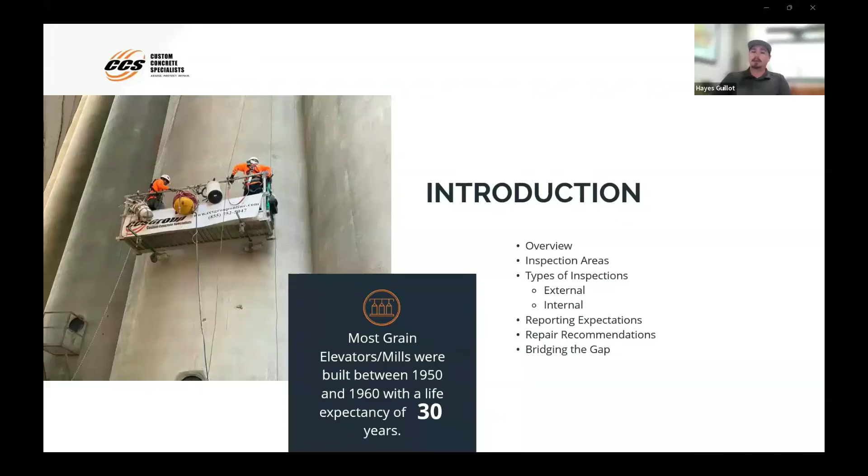So most grain elevators and mills were built between the 1950s and 1960s with a life expectancy of 30 years. Now, most of these facilities have long been operating past that, and part of that is because of maintenance and keeping everything running as it should. So we're going to talk about some of those maintenance areas, some concerns of what you'll find around these facilities, different types of inspections, the deliverables and reports we get from those inspections, the repair recommendations, and then finally taking all of what I'll present on and what we call bridging the gap, and explaining what that is later in the slides.

So the importance of maintaining a facility is preventative versus emergency. Some things to consider would be cost. Structural repairs may cost 10 times more than preventative maintenance per silo. And then also to go along with that, the downtime. Preventative maintenance has little to no downtime as opposed to full scope structural repairs, which could span multiple weeks, if not months, depending on the scope.

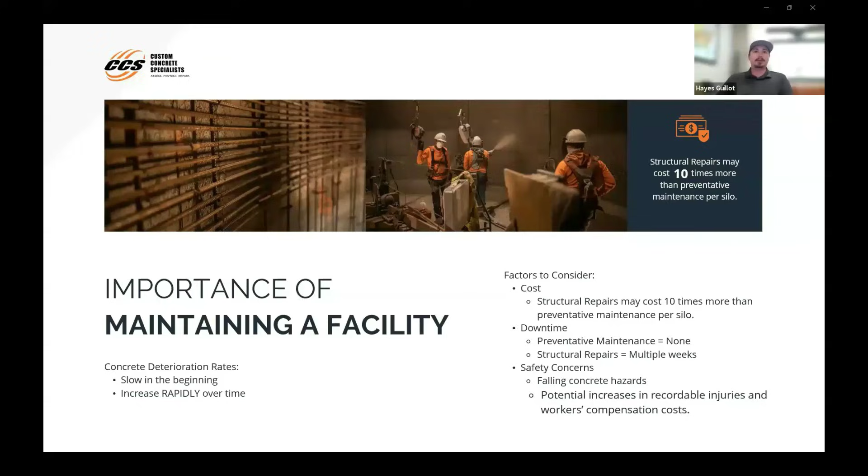Then safety concerns. Anytime you have concrete delaminating from a silo, there is that concern of it falling, hitting vehicles, hitting people. And to go along with that, you have the increase in recordable injuries and workers' compensation costs. So nobody wants that. And then a little note here, concrete deterioration rates. It starts very slow. You get some little cracking, some spalling. But once that shell starts to crack and you introduce moisture, freeze thaw, the weathering conditions, it increases rapidly over time. So don't wait for an emergency.

Deterioration occurs. It's a normal part of concrete, a normal part of your facility. Normal wear and tear, it happens. Exposure to weather, especially, like I said, that freeze and thaw, where you get moisture and then in the winter it freezes, and then when you get a warmer day it thaws, and that repetitive cycle causes the damage in those small areas to expand quite quickly.

Then you have structural deficiencies and failures. Sometimes you'll see that when these silos were initially constructed, engineering back in the 40s and 50s wasn't as streamlined, wasn't as up to date as what we have now with the technology we use now. So they had to just go with what they had. So rebar and the way they built these wasn't always an exact science.

Then you have operational changes. When these silos were built in the 50s or 60s, the turn rate of these bins wasn't as much as what a lot of these facilities are doing now. With the increased size of legs and conveyors, we're able to fill and empty these bins a lot quicker. And because of that, a lot of people add these larger pieces of equipment on the outside without reinforcing the silos themselves.

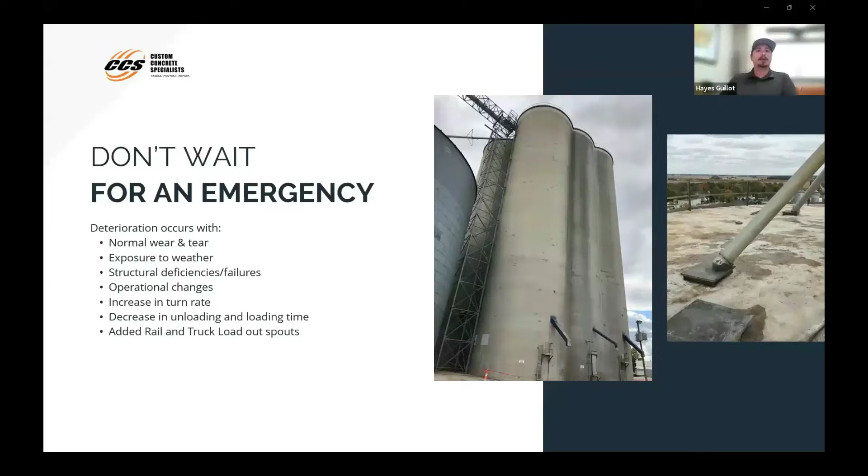That can also rapidly increase the deterioration rate of a silo. And along with that, if you're adding any truck or rail loadout spouts, cutting holes in the silo, that will also affect the structural integrity of those silos.

So we like to approach it as a yearly checkup as opposed to an emergency room visit. Focus more on the yearly checkup, make sure everything's still looking good, rather than the 'oh my gosh, we have a major problem and we need to get this fixed right now.'

So establish a baseline health check for your facility. We'll come out, take a look at the entire facility, and make notes of any areas of concern, any areas that we want to monitor.

And it doesn't have to be something wrong with your facility. I have a lot of facilities that just want that baseline health check and that kind of stamp of approval that everything looks good. That would decrease insurance costs. A lot of insurance companies, if you can show that you've had an inspection, will decrease what you're paying for your facility's insurance. So being preventative or proactive as opposed to having to be reactive when there's something major happening.

And then information gathered can be shared with engineering. So we share all of our deliverables with the customer, which can then be passed along to engineering companies, or just used internally within the company or wherever else it's needed.

So I've talked a little bit about moisture, freeze thaw, and moisture migration. Moisture migration exerts force on concrete, and it causes tiny cracks in that concrete.

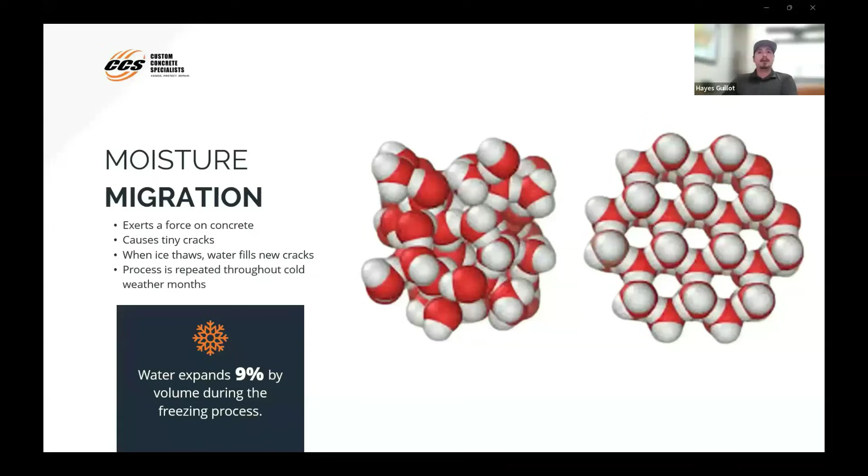So when water gets in and freezes, it fills those new cracks. And as that process repeats and expands those cracks, water expands 9% by volume during the freezing process. So even the littlest crack, if water can get in there and freeze, it starts pushing that out, expanding cracks, corroding rebar. When you introduce moisture to rebar, the corrosion makes that bar expand as well, which then causes more cracks and the delamination of concrete.

So some external inspection areas I wanted to touch on today are the silo walls themselves, the apex walls which are the crooks of the round silos, the roofs, the beam pockets, cornice areas, any bulging areas, wall penetrating equipment, and just all around noticeable changes or things around your facility.

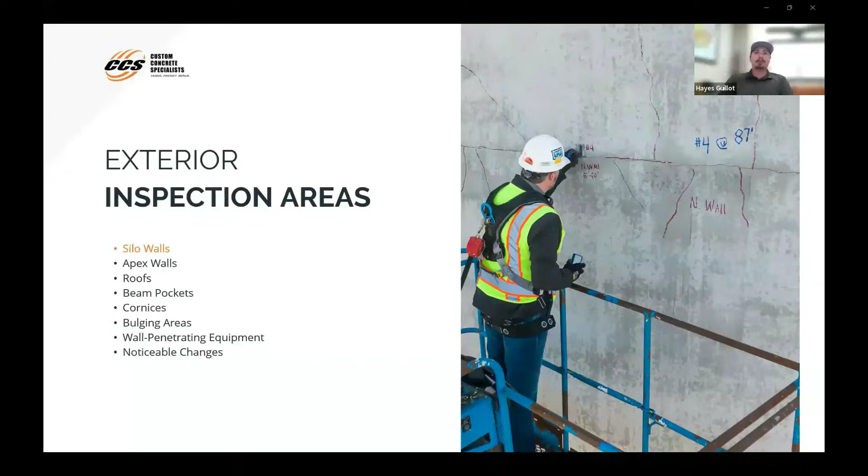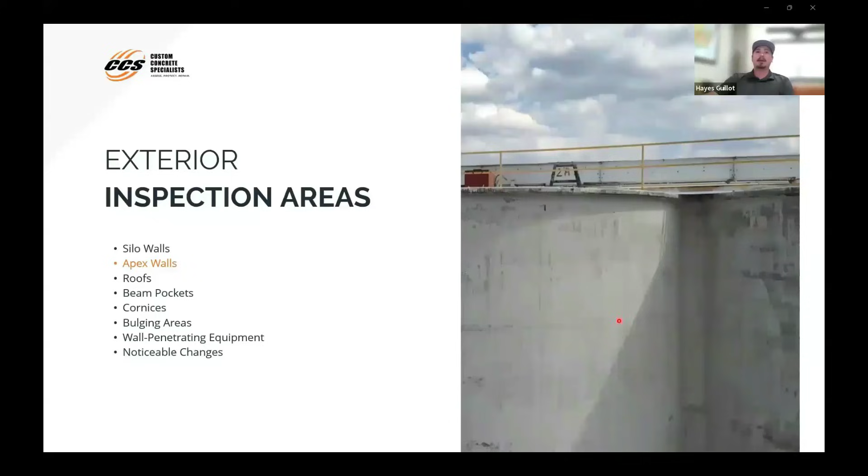So your apex walls are these areas here where the round silos tie into the walls. A lot of times you'll see some separation here, so we just want to make sure that we're not seeing that, or if we are, we can monitor that as well.

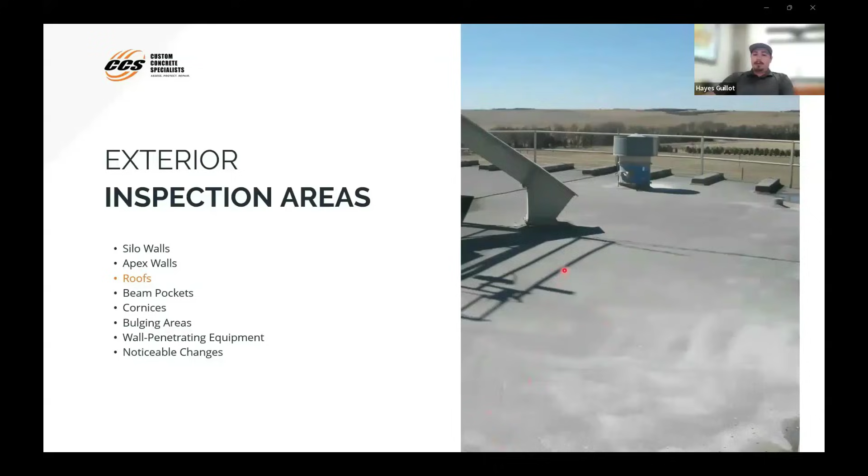Beam pocket areas—so where your roof sits on top of the silo with those beams. They're two separate pieces, so your silo itself and your roof freely move independently.

So as those silos go into tension when filled, or contract as you empty, those walls and those beams can knock up against each other. And over time, that knocking against each other can start causing concrete to crack out, to delaminate and fall, and eventually those beam seats won't have any concrete holding them on.

And in worst case scenarios, those beams will separate from the roof and potentially fall into your silo, causing quite a bit of damage and being very difficult to get out. So you definitely want to catch that before something like that were to happen.

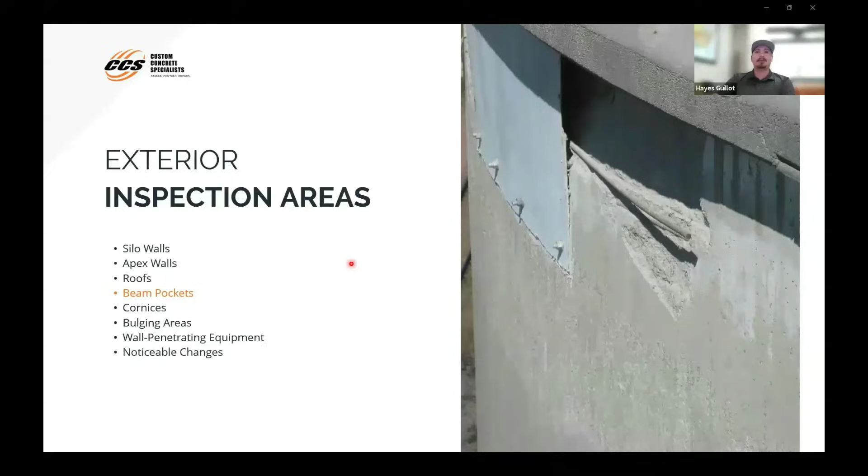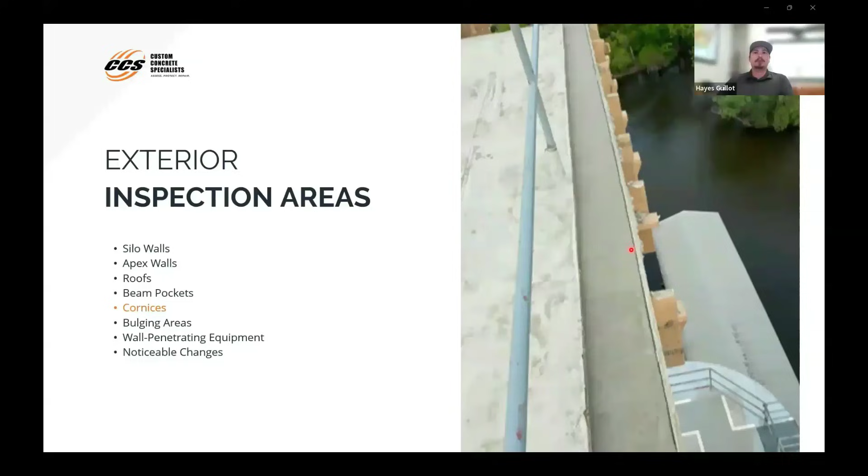Then your cornices crack and fall off over time, especially as you have moisture running over them. Any cracks that moisture can find start causing that to delaminate.

Then any bulging areas—this area here would be a pretty big concern. We would definitely want to do something about that. There's a lot of pressure pushing up against these walls. I would assume just visually that this is lacking rebar, and we could actually find that out for sure by using a GPR, or ground penetrating radar, scan over this area, which I'll get into more detail on in a minute. But this is definitely an area where a potential rupture could happen.

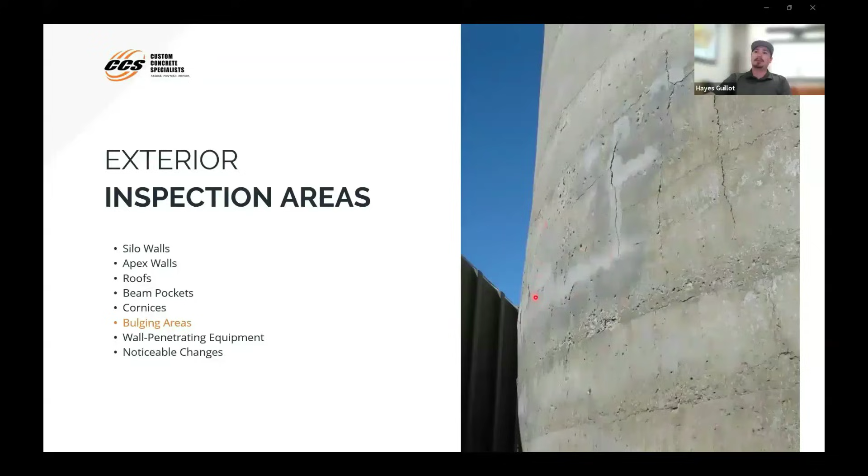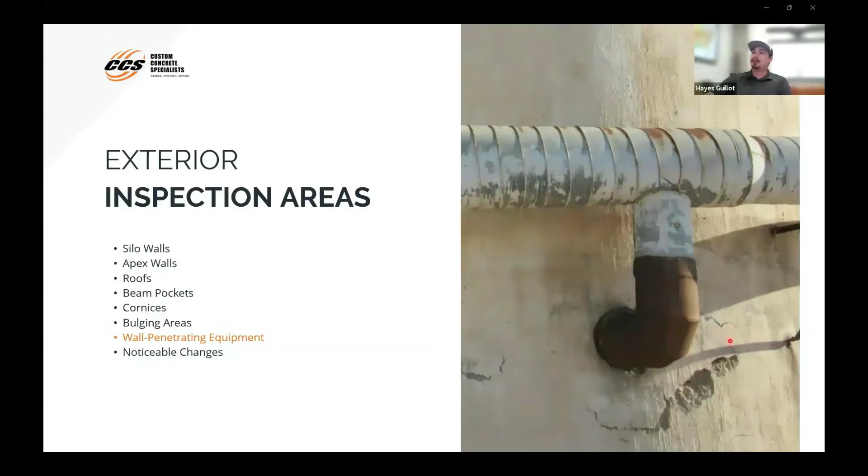Then we definitely want to look at any wall penetrating equipment, so any of your aeration, any spouts, any fans. Sometimes when they put these in, they're an afterthought. So they'll just cut a hole and run air, like this here is aeration, run the aeration in without necessarily reinforcing that area.

So if that's the case, you'll start seeing some cracking and spalling around there. And then just any areas of noticeable changes that we want to monitor over time to make sure they don't get worse. This area here is a good example. Above and below, you're not seeing a lot of cracking, but this elevation here, you have quite a bit of vertical and horizontal and even some diagonal cracking.

So we would want to take note of that and measure some of these areas, and then maybe a year down the road when we come back, just make sure that this hasn't grown. If it hasn't, then we know it's cracked to the extent of what it's going to do. If it has, then we can talk about why it's doing that.

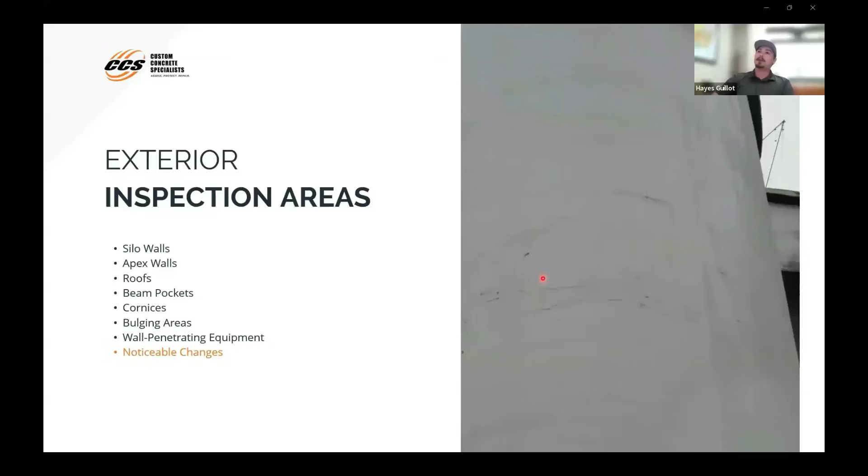So this here could potentially be lacking rebar. It could be that the rebar is there, but it was floated too far to the outside of the wall in this elevation. So that's why it's starting to crack out as that silo goes into tension. It's putting some force on those outside walls and just causing some cracking. So there's a lot of ways we can determine what the cause of it is, but just here we're looking at it visually at this point and just want to monitor it.

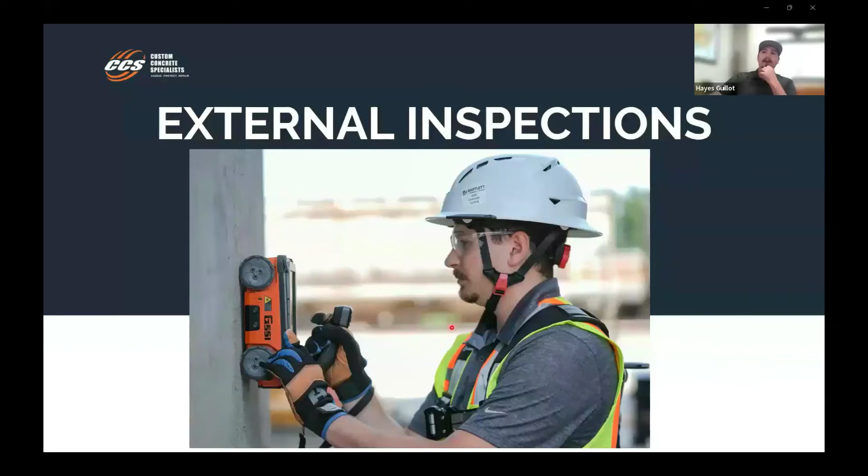So then some of the technology we use for external inspections are this here is a ground penetrating radar, and I'll go into that a little bit here in a minute.

And then sound testing. So what sound testing is, we go up in a boom lift or up on some platforms, depending what elevation we need to sound test. And we'll hit the wall with a hammer to kind of determine the amount of potential spalling in a certain area.

Solid concrete will produce a ringing sound when hit with a hammer, whereas an area that has a risk of spalling will produce kind of a flat or hollow sound. So we'll go around all the way up the silo and hit some areas to determine which areas are at risk of spalling.

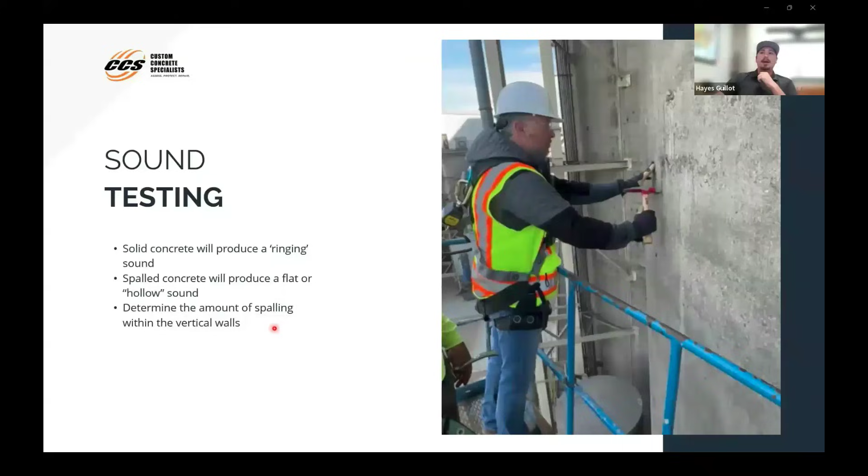So we can get a really close look with the drone, and we capture videos for the entirety of the facility. We also capture up close pictures or points of interest, POIs. We can get elevations off of the drone, so it's constantly capturing at what elevation we are at. So I can say at 65 feet, there is a vertical crack on the west wall.

And then all this data is very easy to share. We share in multiple different ways, so usually Dropbox, SharePoint, or we can actually send it to you on a thumb drive or a hard drive. And then this makes it very easy to re-inspect the same silo, same facility year over year.

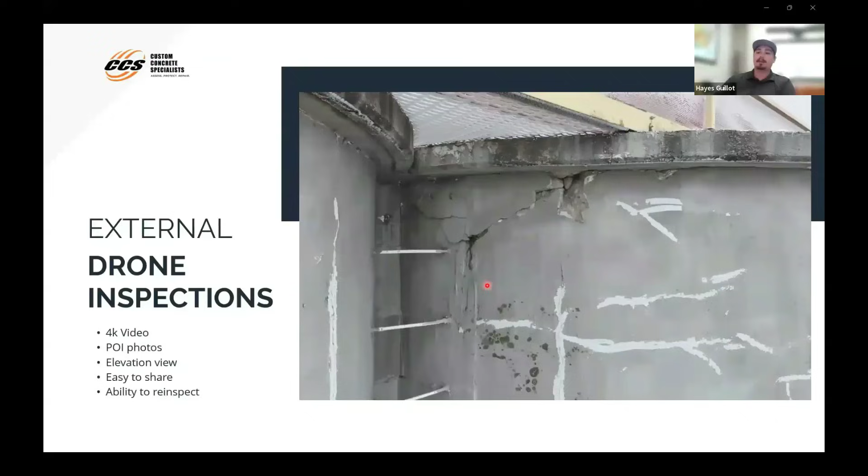So GPR, or ground penetrating radar, is this device here, and it helps locate horizontal and vertical rebar. So we are able to identify every single piece of rebar in that silo. We're also able to determine the depth of the rebar into the concrete and the entire wall thickness as well.

One thing that I get asked a lot prior to doing the GPR inspection is, do the silos need to be empty, or can they be full? Can we be filling them, emptying them? The answer is yes. It can be full, it could be empty.

This is an external inspection, and the way we do this is we utilize an aerial lift, and we start at the very base of the silo, and we run the scanner vertically all the way up to the top of the silo just underneath the cornice. And we are mapping every single piece of rebar along the way.

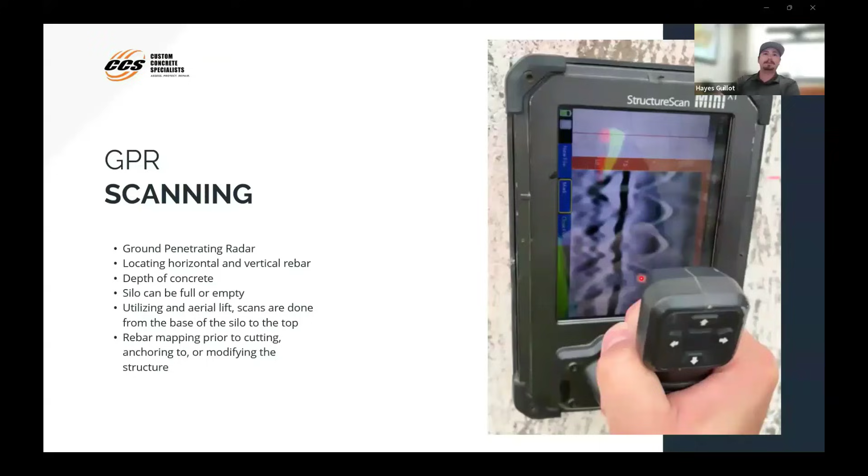And this is what it looks like on the scanner, as well as when I bring it into the software to process. These mountain ridge looking areas are the rebar itself. They're called hyperbolas, or we call them heartbeats, as we go up. This will show the depth into the concrete as well as the spacing between each bar.

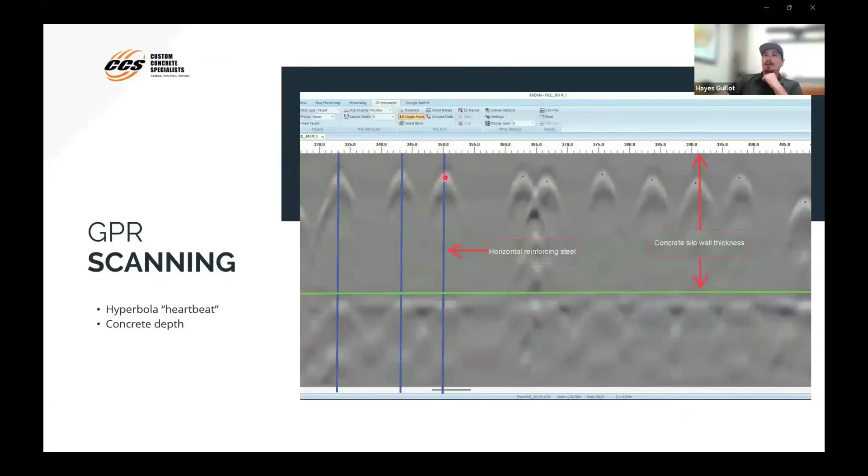And I go in and literally click on each one of these hyperbolas, and then it generates a report with all of the findings. So I'll show some reports here in a minute.

The internal inspection areas, this is where we use that internal drone. So we put this internal drone in from either a top opening or a side opening, and we are able to inspect the entirety of the inside of the silo. So everything from the roof to the walls to the hopper, and just get a full look at everything going on inside that silo.

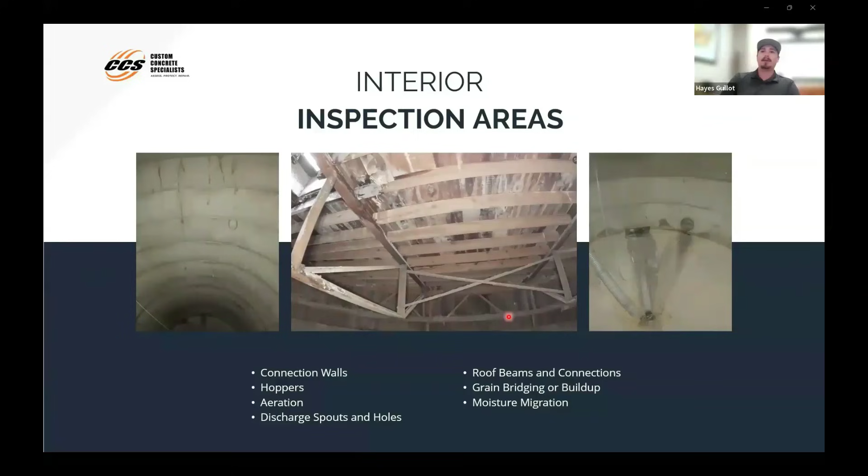So I wanted to show real quick the software. So I'm going to switch screens real quick.

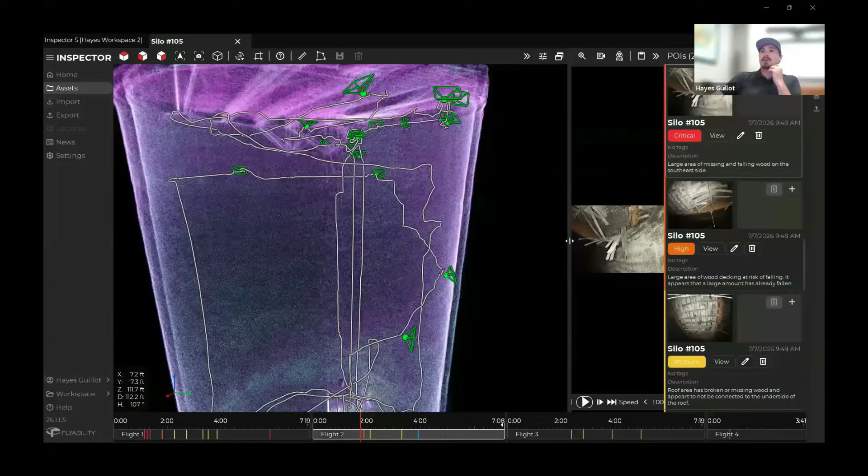All right, so what I have here is the actual inspector software that we bring all the internal drone data into to process and look at everything. So we have a few different features here. One of the most interesting ones is this LiDAR point cloud here.

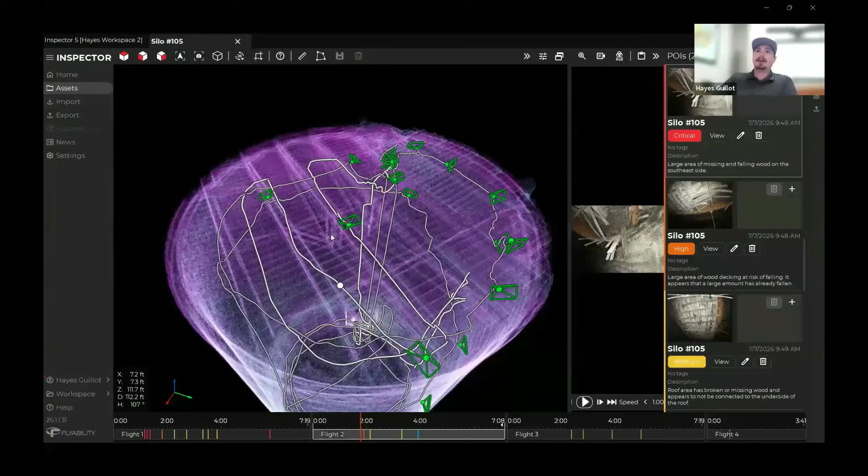The drone itself, the drone we use is a Flyability Elios 3. And so it has a LiDAR puck on it, and we're able to create a 3D model of the entirety of the silo. So I'm going to kind of navigate around.

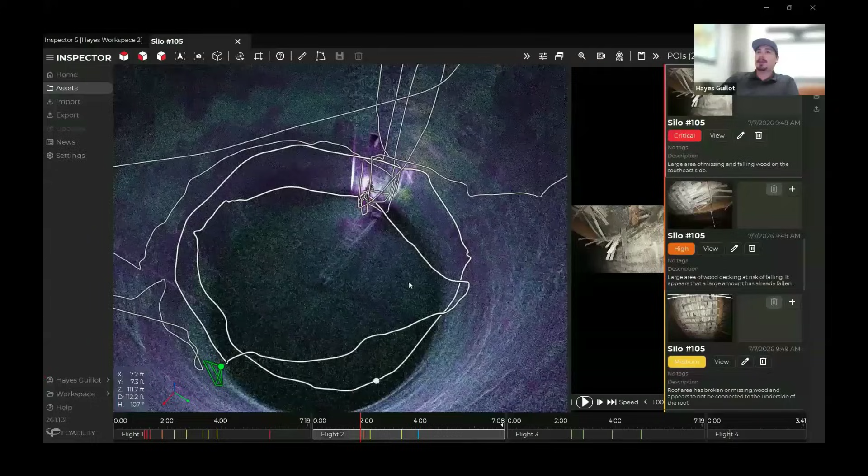You can see the hopper here. This lower entrance is where I entered the drone. It actually shows all of my flight path as I flew around the silo.

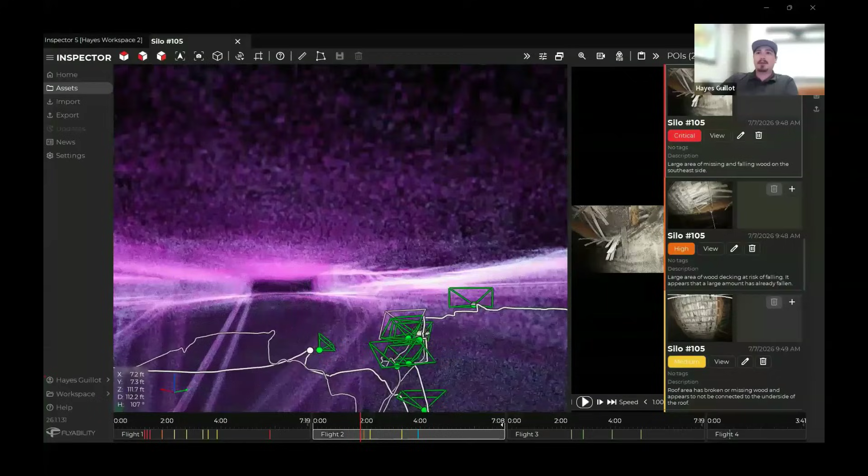And then if I zoom out here, zoom in a little bit, you can actually even see the roof beams and the wooden trusses. But what was going on with this silo particularly was they were having wood laminate off the roof.

So if I go here, you can actually see where that wood was sagging and had fallen. And then if I go to the actual drone's camera, you can see that area as well.

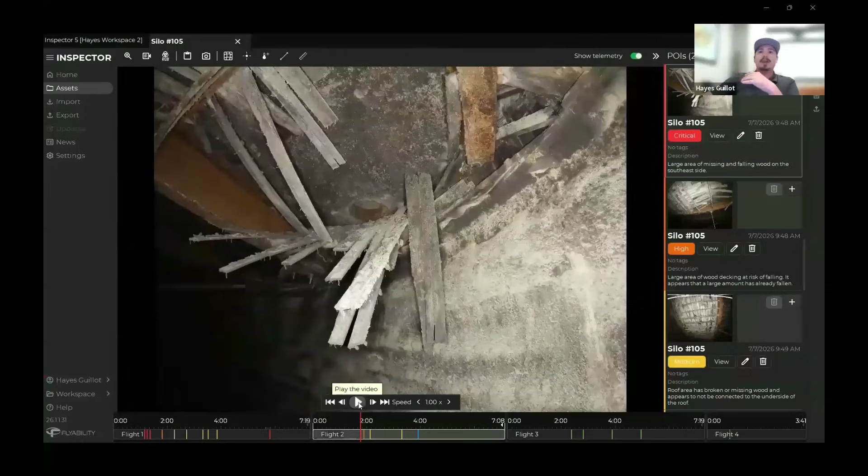So this is a video which I had paused at this area to show the LiDAR in that area. But if I play the video a little bit, you can see me flying around, looking at the roof here, looking at some of those areas that were falling down.

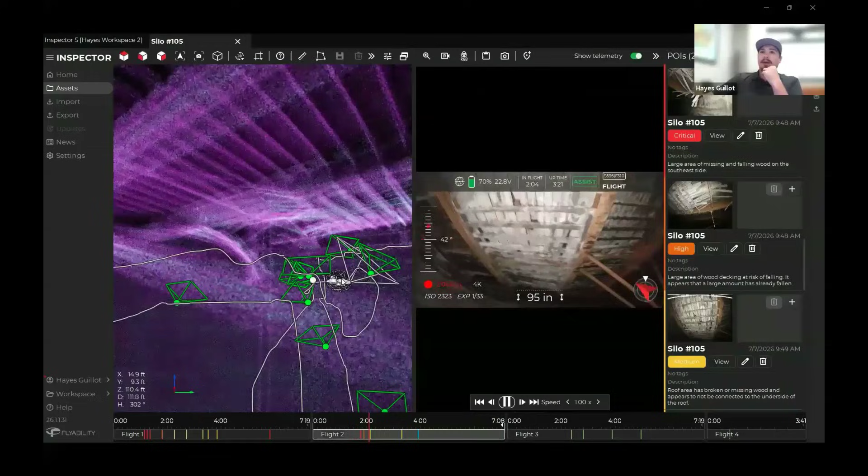And you can actually, while this is playing, see the little model drone flying around as well. So I can at any point pause this video and say, okay, well, there it is in the video, and kind of look around in the model as well to help get your bearings. It also helps with just identifying areas.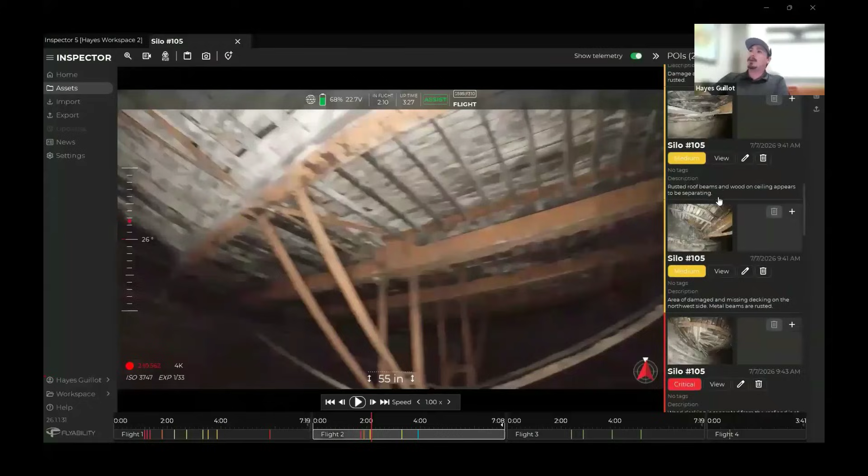Then this is how we generate reports that we give over to the customers as well. So for every area that we need to take pictures of, or some concerned areas like this area here, we can take a picture, label it with a criticality level. So definitely this is of concern, so we say very critical, and then I give a description.

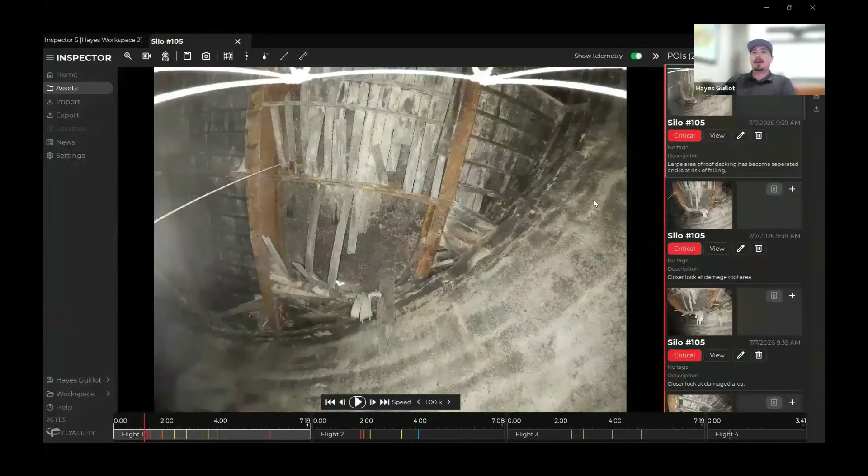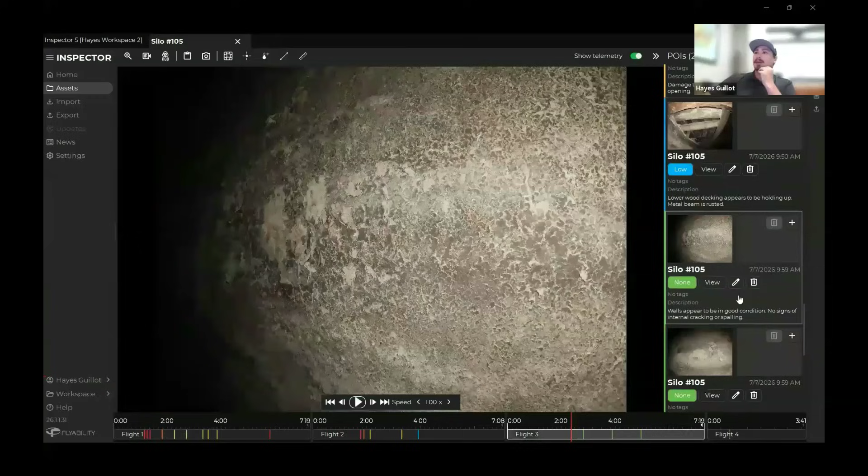This will show all the elevation, the X, Y, Z data, so you know exactly where in the silo this was taken. So if we took a picture of, like a wall, it's really hard to see in the picture, well, like where in the silo is that? So we know that if I click on it, go into edit, it shows the X, Y, and Z, and it will actually show in the video at what heading I was on looking at that. So 266, so we were kind of on the western side of the silo.

So that's the software. We can look at the entirety of the silo, like I said. We're looking at the roof beams, the beam connections or beam seats, where they connect to the wall, trusses or any supports, any cross arms, the decking, the hopper connection points, internal walls, and then if there's any foreign debris or commodity buildup, we can look at that as well. We can do volume of how much commodity is in there.

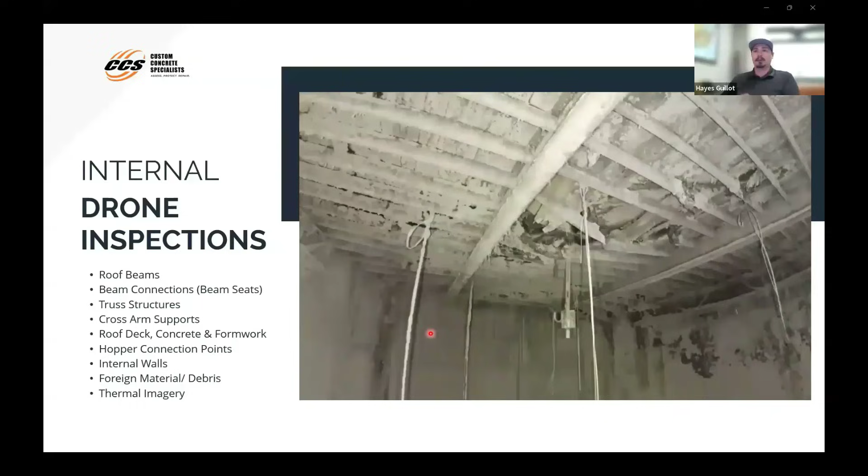And then the drone itself also has thermal imaging. So the thermal imaging is really cool. We've actually done some flights into bins that were smoldering, that were on fire at one point, trying to identify where those hot spots are and how much of it was still kind of smoldering. So that thermal camera sure helps with that.

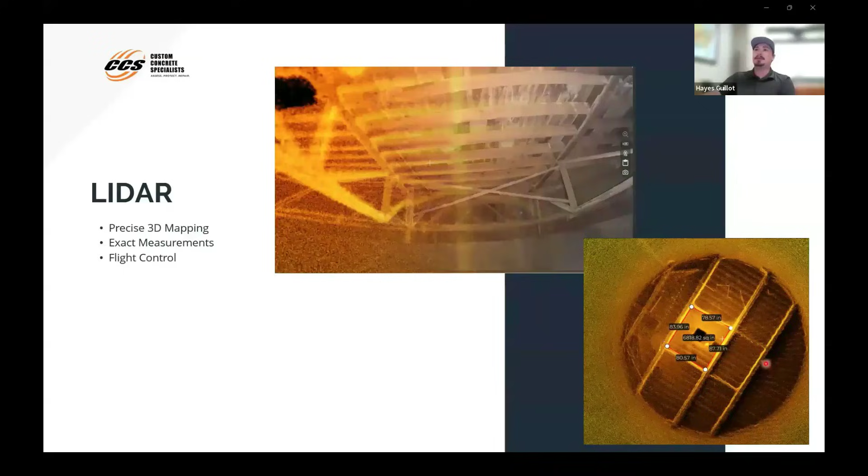Like I mentioned, there is LiDAR. We're able to create that 3D model. We're able to take measurements off of that 3D model as well and send that to an engineer. Let's say they wanted to know the spacing between beams, how many beams were in there. We can give them all that information.

So then we'll go back into the inspection reporting. So internal drone reports - what is created out of that software I was just showing is a PDF report that has the points of interest, the elevation of where those were found, the location of issues, so on the northwest wall or the ceiling, where that is.

Then you also have the LiDAR modeling. So you have a LiDAR model and thermal. And then we also send all of the raw data as well - all the raw videos, the thermal data, the LAS file, which is that point cloud file. So if you have a software that's able to view that, and there's a lot of free ones out there that are free downloads, you can just download that, throw that file in there, and take a look at that 3D model. So I'm going to pull one of those up as well.

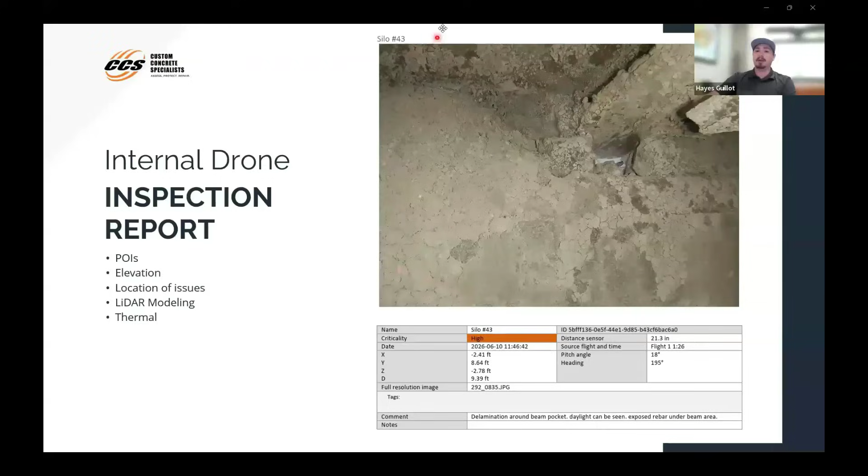Okay, so this is what that report would look like. It would be your town, the silo number. Then we would have kind of the name again, so your town, when it was created, any description, the number of inspections. So this one was just one inspection, but if we had multiple, it would have 4 inspections.

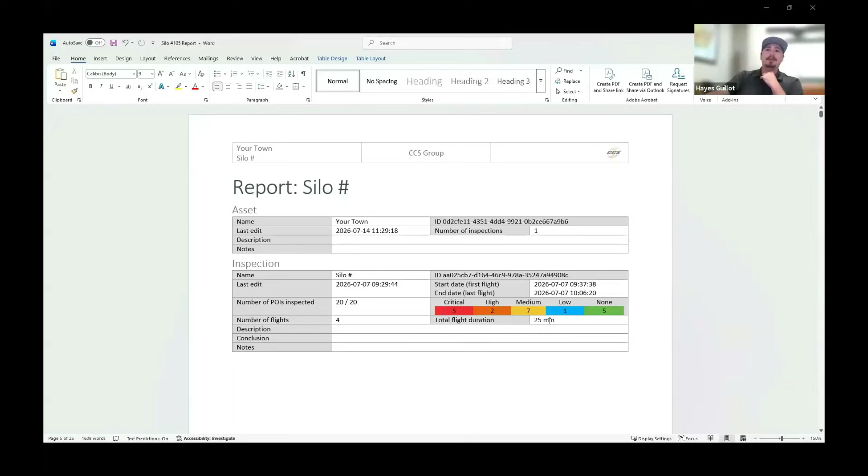And then the silo number of points of interest, so 20. Then those criticality levels and how many of those points of interest fall into each category. And then the total flight duration - this inspection lasted 25 minutes, and that was with 4 flights. So 4 flights totaling 25 minutes of flying. It shows each individual flight and how long each of those flights were.

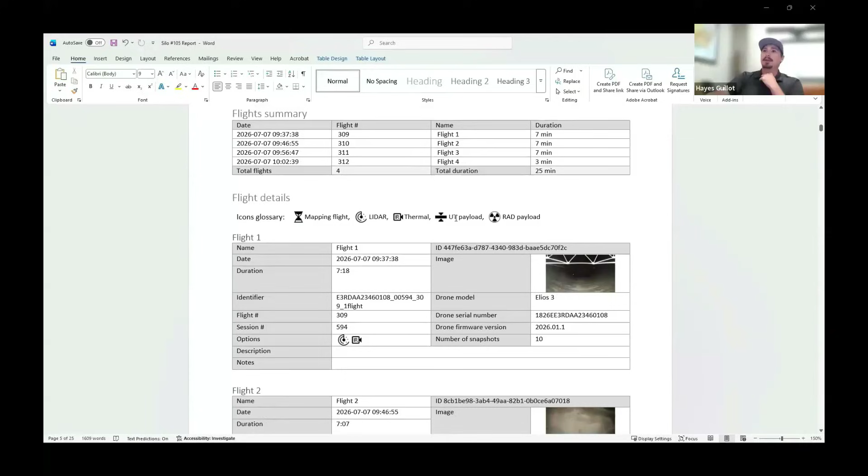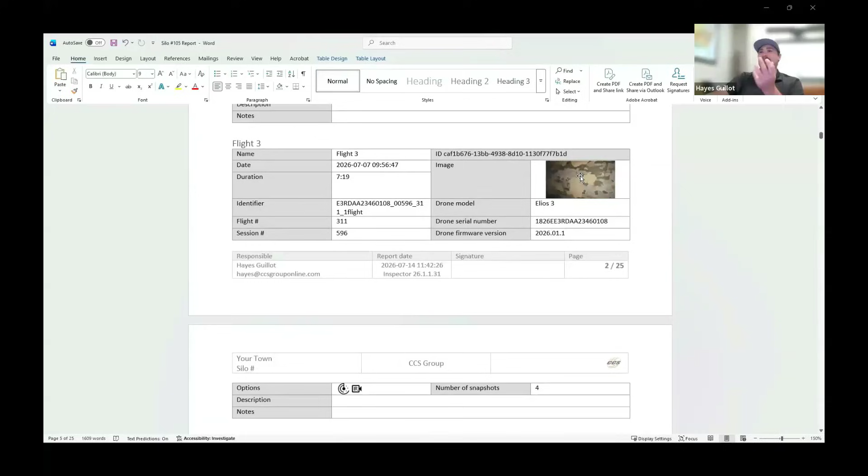And then it has a little flight icons glossary. So what kind of flight was this? A mapping flight - we used LiDAR, thermal. There is a ultrasonic thickness payload that's an optional payload, and then a radiation detection payload as well. Currently we're not utilizing either of these, but those are easy add-ons that we could definitely throw on there. And so for each flight, there's a little short description, stuff to do with the actual drone model we used, and a little picture to show each one.

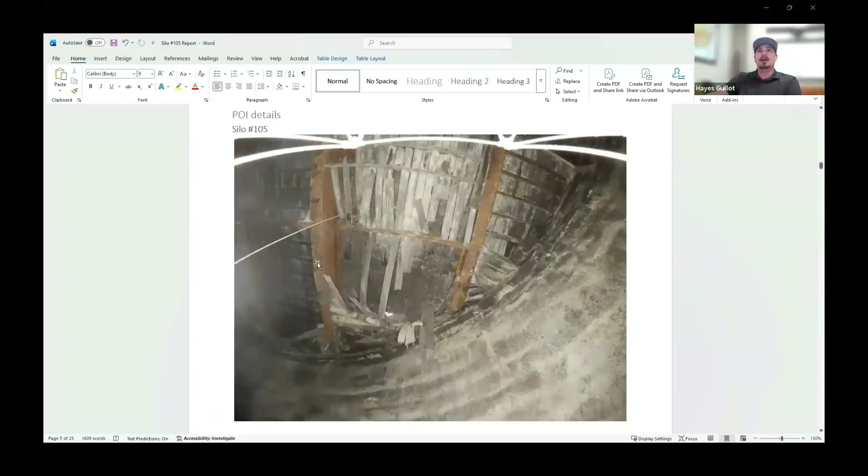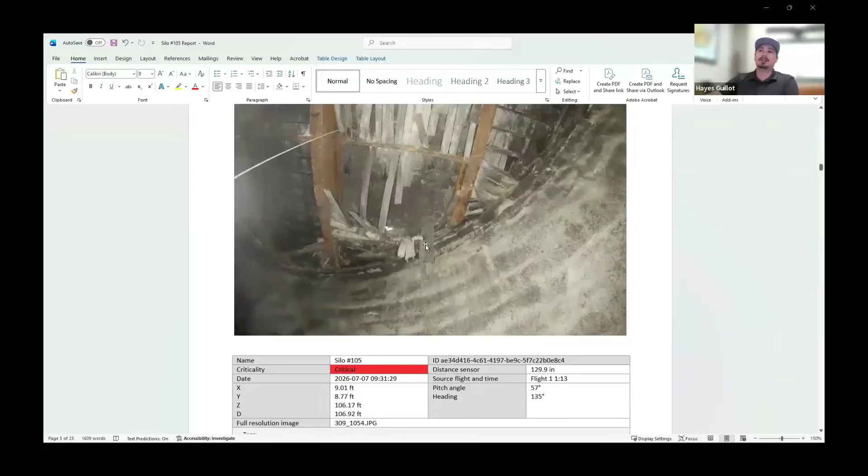And then if you get down to the meat and the potatoes, those criticality levels, but then you get to the actual points of interest. So this was silo number 105. It shows this area of wood falling down - it was very critical. The sensor distance, so it does have a distance sensor, and it says we were 129.9 inches away from the roof. Our pitch angle, so the camera's pitch angle, and then our heading of the drone itself - how far up was that camera tilted.

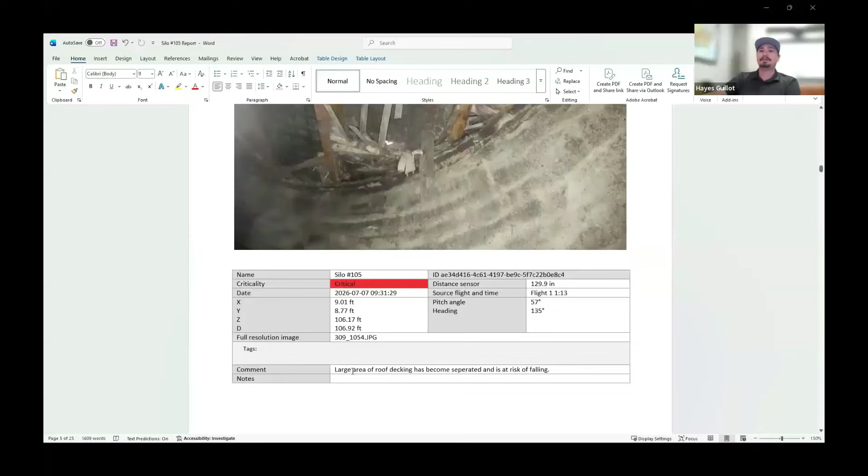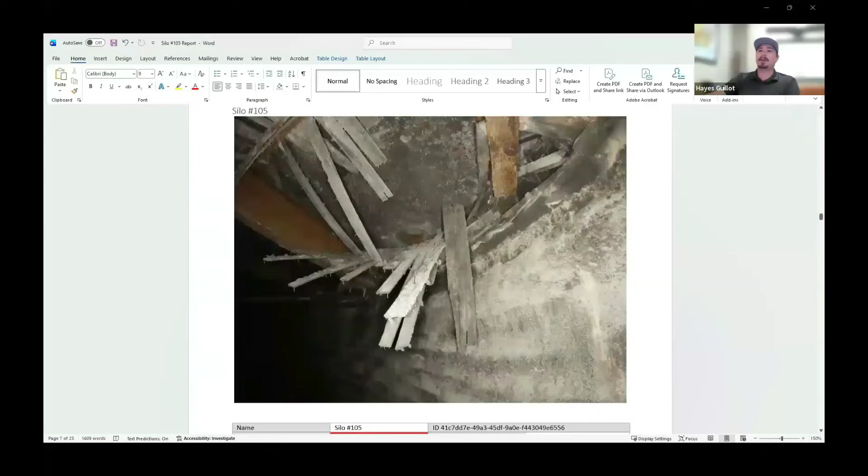Then your X, Y, and Z - so we were 106.17 feet up. The distance away from me, so where the controller was, 106.92. And then the XY data, and then a comment: a large area of roof decking has been separated and is at risk of falling. So you have a lot of these different angles. I got closer - just anything that is of concern or needs to be monitored, or even in good condition.

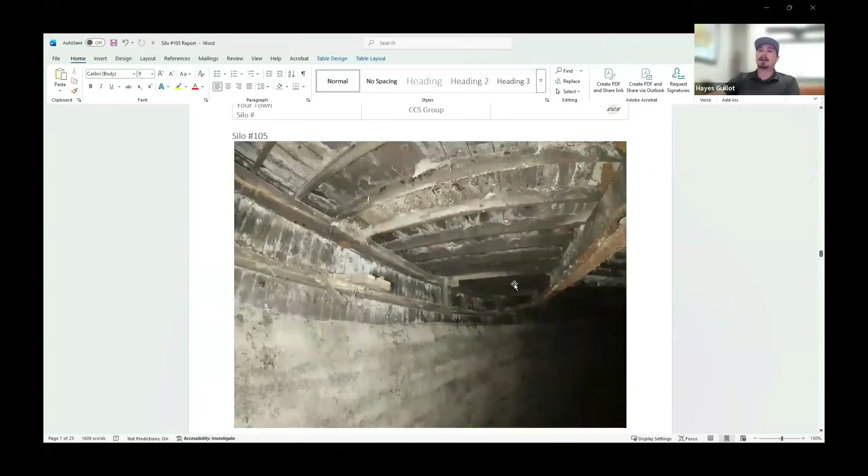So if we look at some areas like the beam pocket areas, and we just note that beam pockets are in good condition, well, great - we can just monitor all of those. So I'll go back to my slides here.

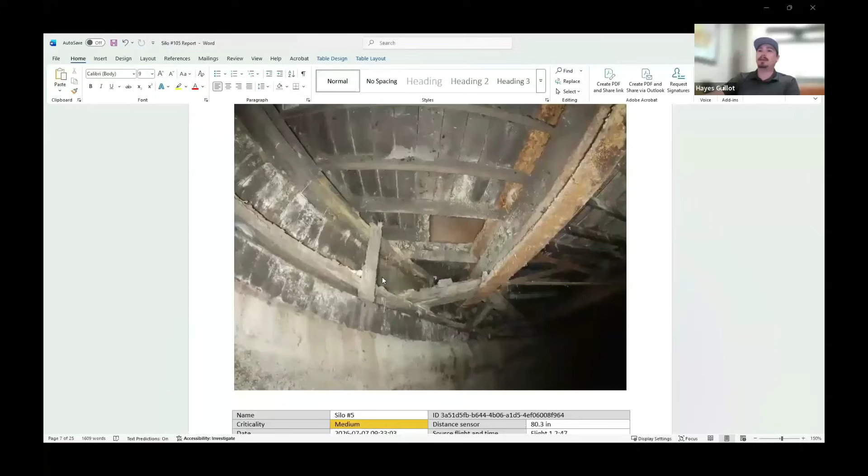So this is what that GPR report looks like once I get it out of that software. This is just a short snippet of a full report.

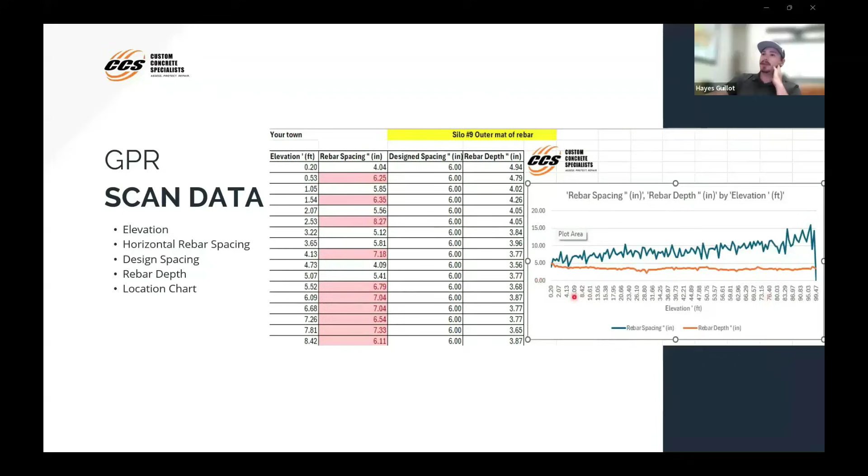Lastly, this is just another way of viewing the same data, and it shows the same information, the spacing, and then those elevations in feet, and then the rebar spacing versus rebar depth.

And so with all of this information that we're gathering, if we do find something that needs repaired, we are able to come back, identify, and go through all of the data collected and provide very accurate repair recommendations because we were able to capture so much data.

So this is just an example of what a shotcrete liner agreement would look like. You have the typical scope of work mumbo jumbo, then you get into the meat and potatoes of the actual scope of work. This one here was a shotcrete liner of silo number whatever, 100 feet tall and whatever diameter that silo is.

You'll have the breakdown of order of operations: project mobilization setup, safety orientation, setup flagging, and then we'll get into the actual materials we use, our actual methodology, how we're going to approach the repairs. We're going to install 6-inch number 4 steel rebar pins, so all of that.

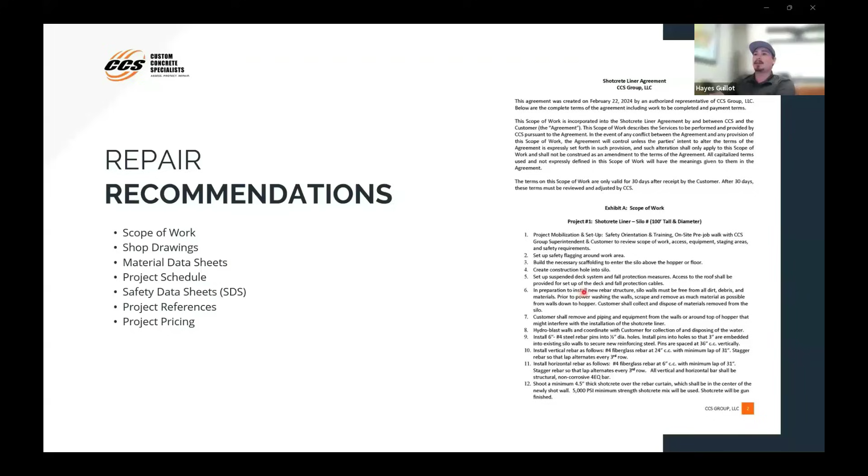So we have scope of work, shop drawings, any materials we'll use, material data sheets, the project schedule—how long is the project going to take—and then any safety data sheets will be sent your way as well, then any references, and then obviously project pricing.

For any areas that need to be chipped out, we'll right angle cut and we'll put a rust inhibitor on the bar and clean up the rebar.

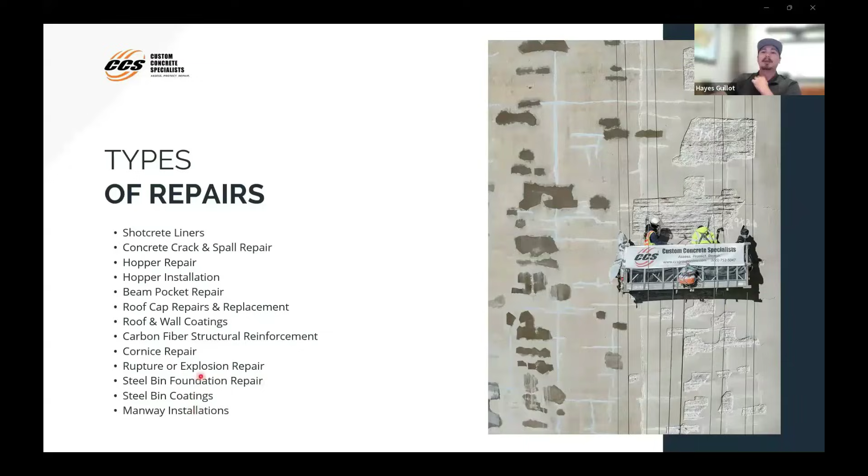So lastly, taking all of this, what we just talked about, the idea is to go from the customer saying 'I have an issue' to bridging the gap to delivering stamped engineer drawings. So being able to provide engineers with this data, provide the customer with this data, so that we have a full picture of going from 'I have an issue' to 'here's the repair, here's the solution.'

And making sure that we have a quicker construction start, completion date, have clear expectations from the customer and from the engineer as to what we will be providing. And this saves time, this saves money, and it's an overall safer project.

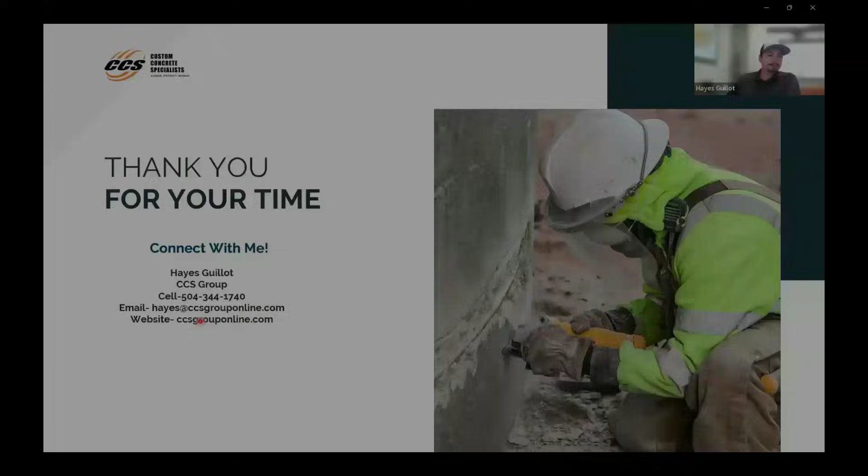Okay, Hayes, I'm going to start with a question. How often do facilities need to be inspected? So like I kind of touched on in the webinar, we recommend an initial inspection, and then usually once a year is a good time frame to just go back, reevaluate, maybe just only looking at the areas that were of concern, or if there are no issues, just ensuring that nothing's changed year over year.

Can the inspection be performed while the facility is still running? So it depends on the inspection. Like I talked about with the GPR, being that that's an external inspection, that can be done full or empty. Now, when you're talking about an internal drone inspection, we ideally would want that to be empty and clean-ish. I know it's not always possible to completely clean your bin.

And there are times if your area of concern for the internal drone inspection was purely that under the roof, the wood falling down, then it doesn't necessarily have to be empty because we're focusing on that area. But the emptier, the better for sure.